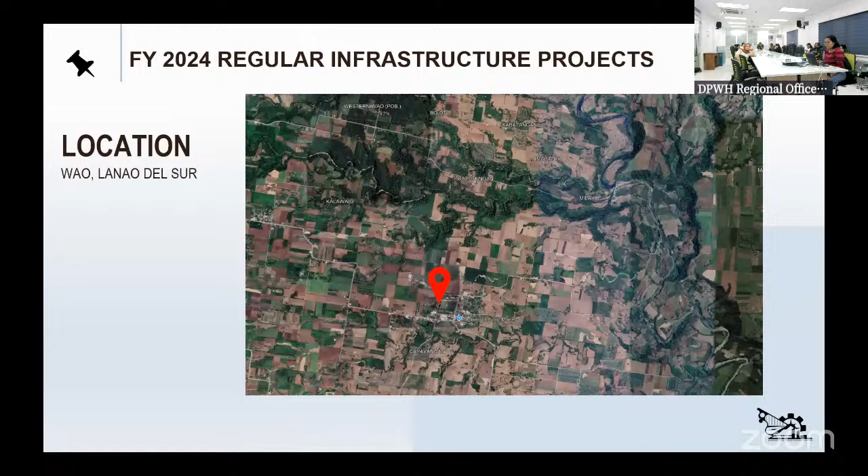Shown is the location map, the perspective, the ground floor plan, the second floor plan, the third floor plan, the roof deck floor plan.

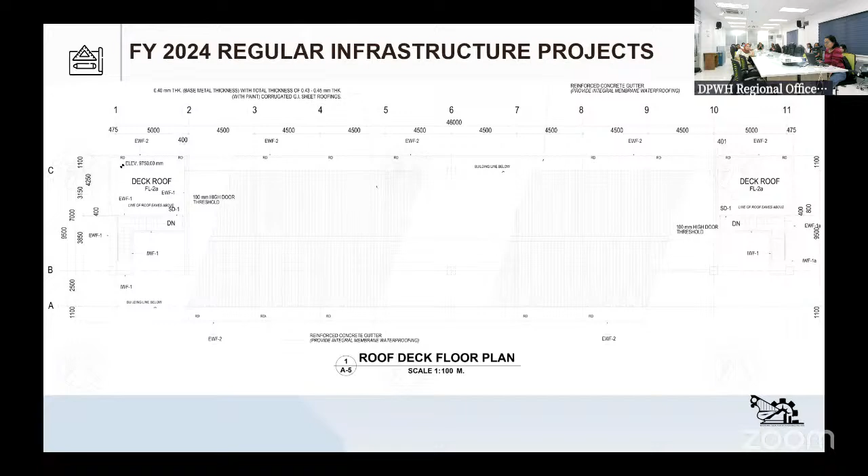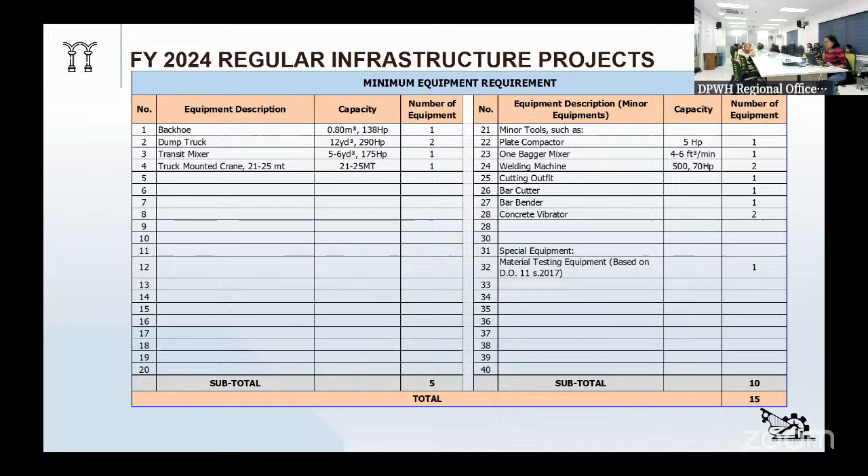For the manpower requirements, we need at least 31 personnel to complete the project. Shown is the minimum equipment requirement. We need at least 15, 5 for the major equipment and 10 for the minor equipment, with the inclusion of material testing equipment based on DO11 series of 2017.

The status of submittal, PAO, DED, and BUQ are already approved. Shown is the approved cover page of the project. Thank you. That's for FY 2024, sir.

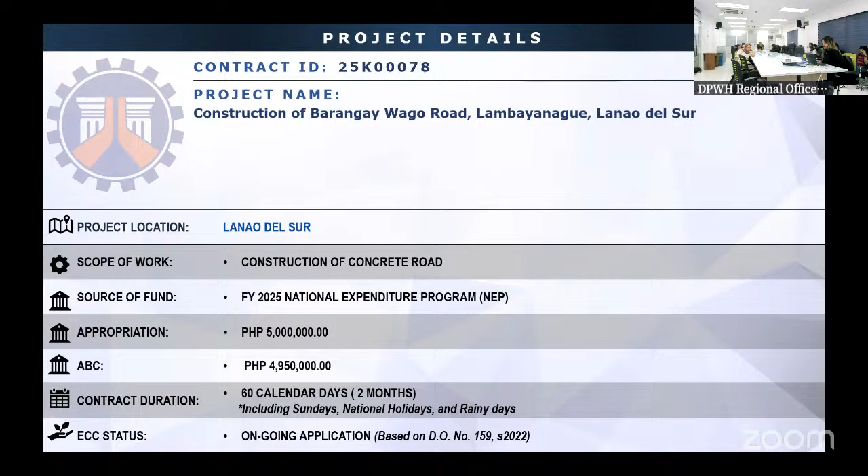For our first project with contract ID 25K00078, construction of Barangay Wago Road, Lambayanague, Lanao del Sur. Project location, Lanao del Sur. Scope of work, construction of concrete road. Source of fund, FY 2025 NEP, appropriation of 5 million with an ABC of 4,950,000, contract duration of 60 calendar days.

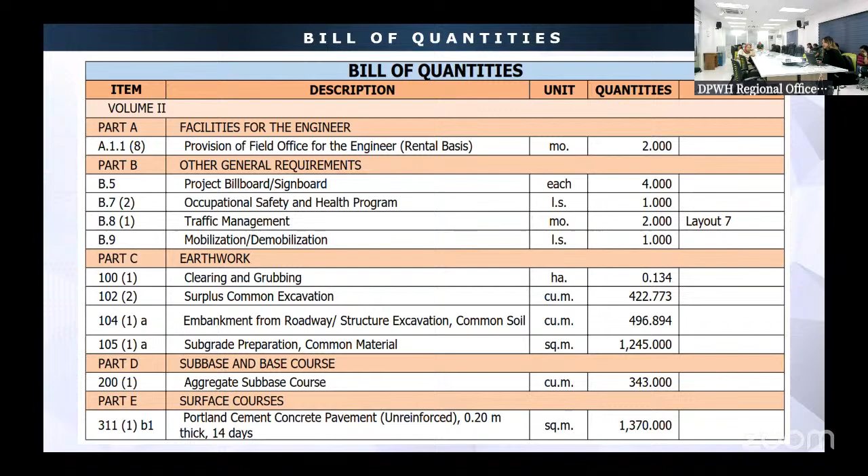For bill of quantities, we have Part A, facilities for the engineer; Part B, other general requirements; Part C, earthwork; Part D, sub-base course; and Part E, surface courses.

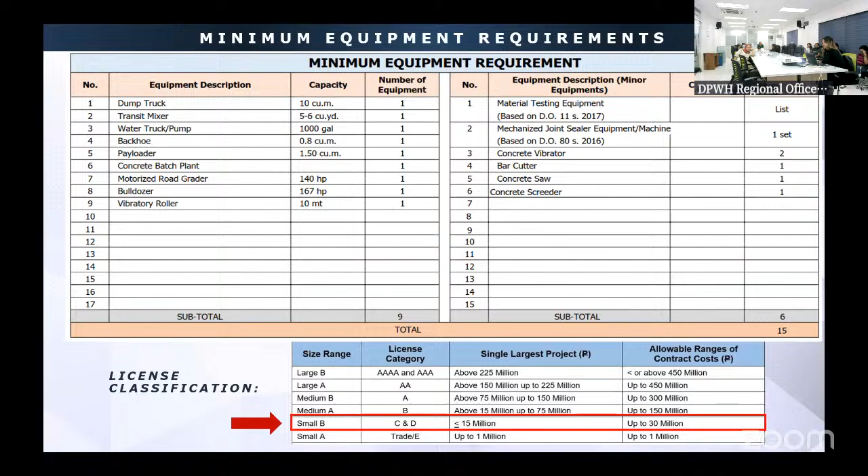For the minimum equipment requirements, we need a total of 15, and take note that the license classification of this project is at least Small B.

Shown is Department Order 11 series of 2017, inclusion of the minimum material testing equipment in the technical component of the bid. Department Order 80 series of 2016, mandatory use of joint sealer equipment, machine for sealing joints on concrete pavements, for small contractors. For the manpower requirements, we need a total of 27 personnel to complete this project.

The status of submittals for this project is already approved, and shown is the approved cover page of the project plan. Any questions?

Project location, Lanao del Sur. Scope of work, road widening. Source of fund, FY 2025 NEP, appropriation of 30,961,000 with an ABC of 29,877,365 pesos, with a contract duration of 120 calendar days, and the ECC status of this project is ongoing application based on DO number 159 series of 2022.

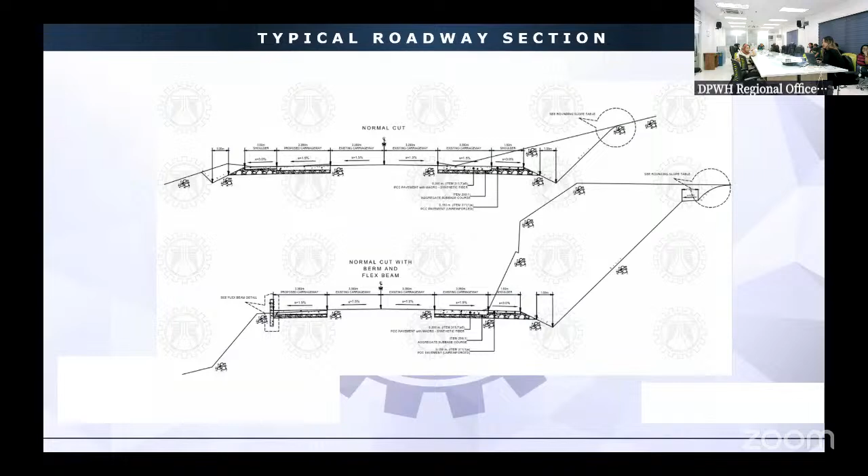Shown is the site development plan of the project, the typical roadway section. For bill of quantities, we have Part A, facilities for the engineer; Part B, other general requirements; Part C, earthwork; Part D, sub-base course; Part E, surface courses; and Part H, miscellaneous structures.

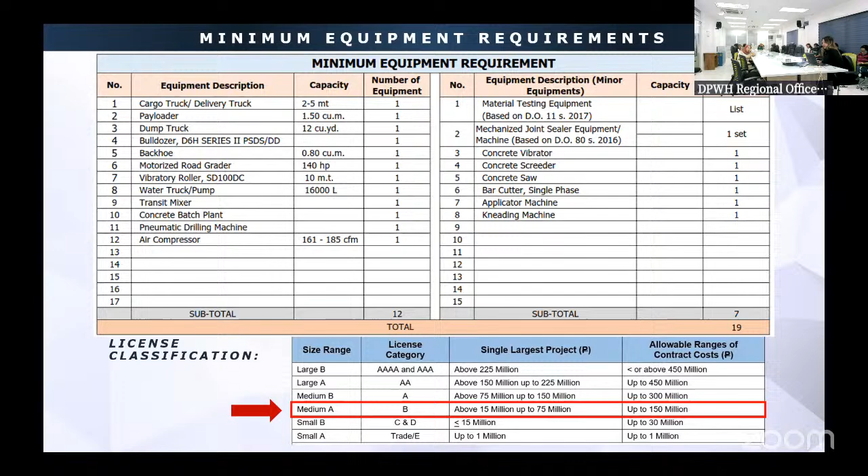For the minimum equipment requirements, we need a total of 19. Take note that the license classification of this project is at least Medium A. Shown is Department Order 11 series of 2017, Department Order 80 series of 2016, for medium contractors.

Engineer Andrina, you should always present the material source map because that is very important information for the prospective bidders. Okay, sir. Thank you.

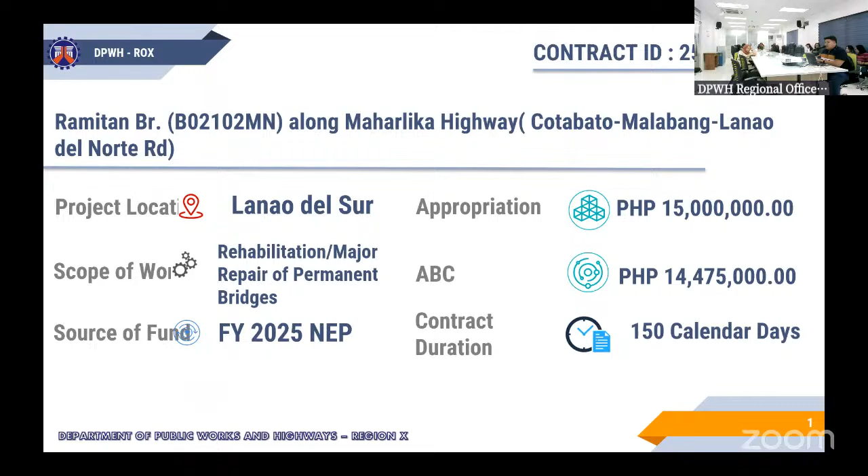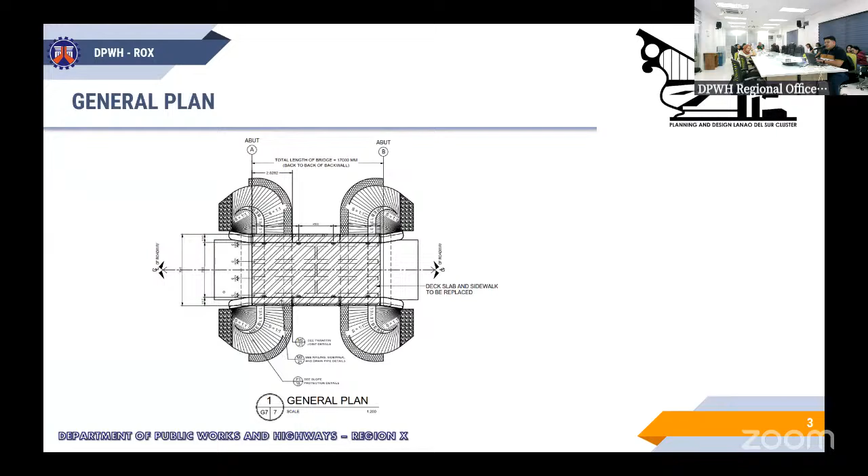Source of fund, FY 2025 NEP, with appropriation of 15 million pesos, an ABC of 14,475,000 pesos, contract duration of 150 calendar days. Shown is the location plan of the project, the general plan, the general elevation.

For the bill of quantities, we have Part A, facilities for the engineer; Part B, other general requirements; Part C, earthwork; Part F, bridge construction; Part H, miscellaneous structures.

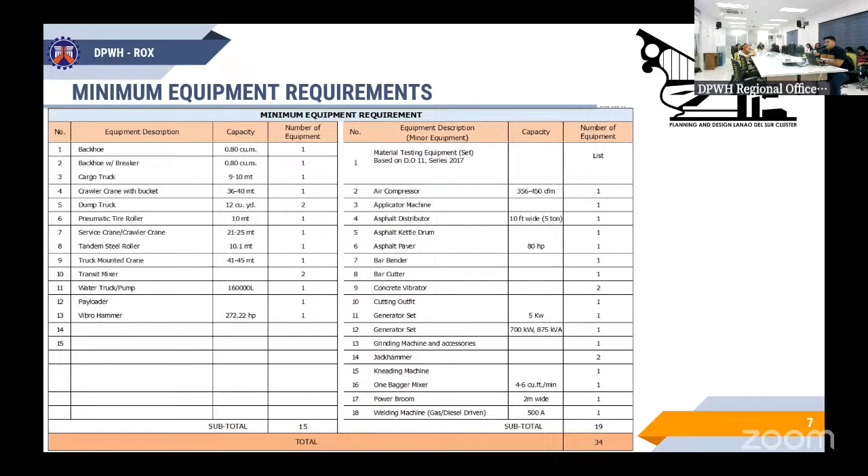For the minimum equipment requirements, we have a subtotal of 19 for the minor equipment and subtotal of 15 for the major equipment, for a total of 34. In compliance with DO 11 series of 2017, inclusion of the minimum material testing equipment in the technical component of the bid, the license classification of the project is Small B.

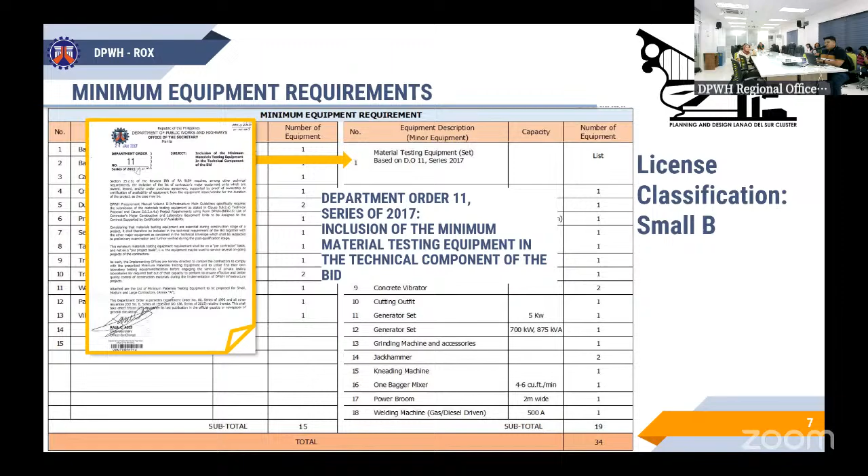Minimum material testing equipment for small contractors. The list of contractors, major construction, and laboratory equipment units to be assigned to the contract, supported by certifications of availability. For the manpower requirements, the project requires at least 32 personnel to complete the project.

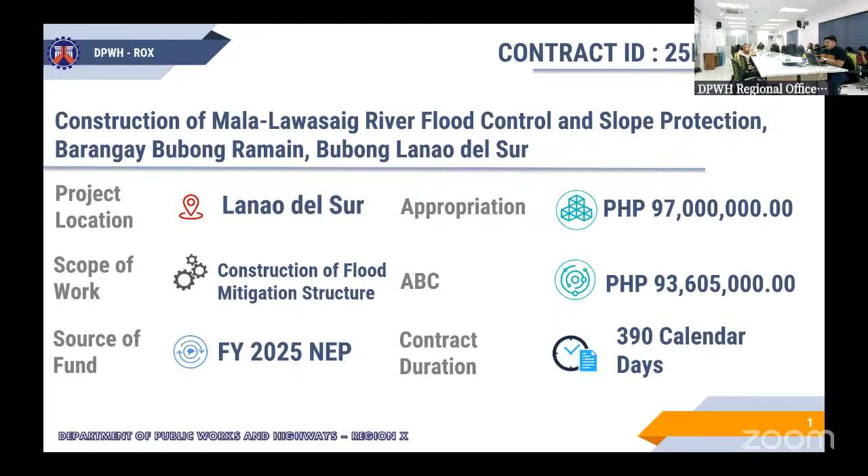The location plan of the project, the typical section with stairs. For the bill of quantities, we have Part A, facilities for the engineer, Part B, other general requirements, Part D, reinforced concrete, Part LA, earthwork, Part LB, bank and slope protection works.

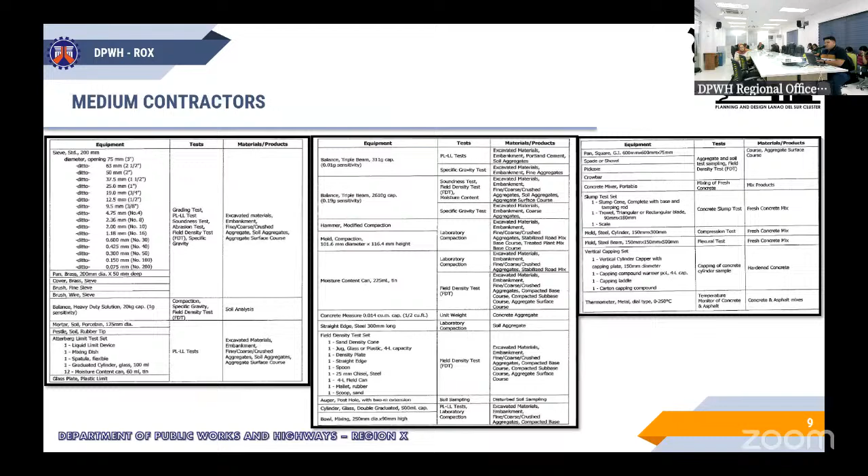For medium contractors, for the manpower requirements, the project requires at least 38 personnel to complete the project. For status of submittals, PAO, ABC, and LUPA, as well as the DED plan and backup quantities are already approved. Shown is the approved DED cover page of the project.

Questions? None. Okay, next. For the last project, we have contract ID

25K00153, Kabaturan Parallel Bridge along Maharlika Highway, Cotabato, Malabang, Lanao del Norte Road, with project location Lanao del Sur. Scope of work: construction of bridge. Source of fund FY 2025 NEP, with appropriation of 60 million pesos, an ABC of 57,900,000 pesos, and a contract duration of 300 calendar days.

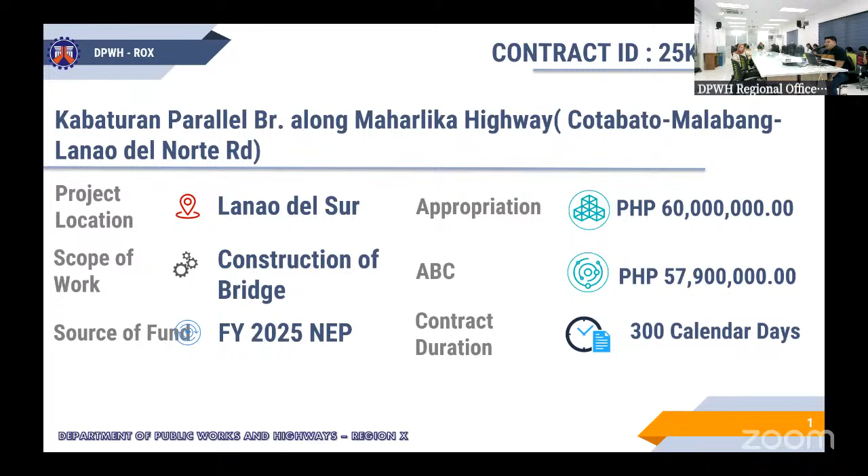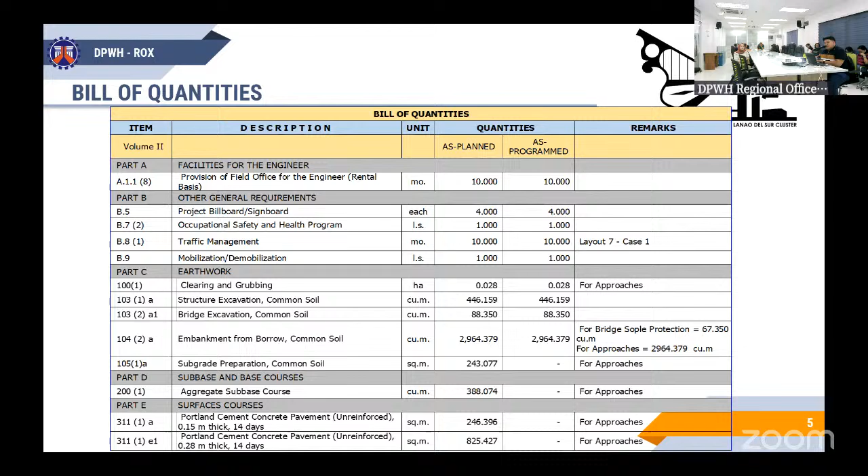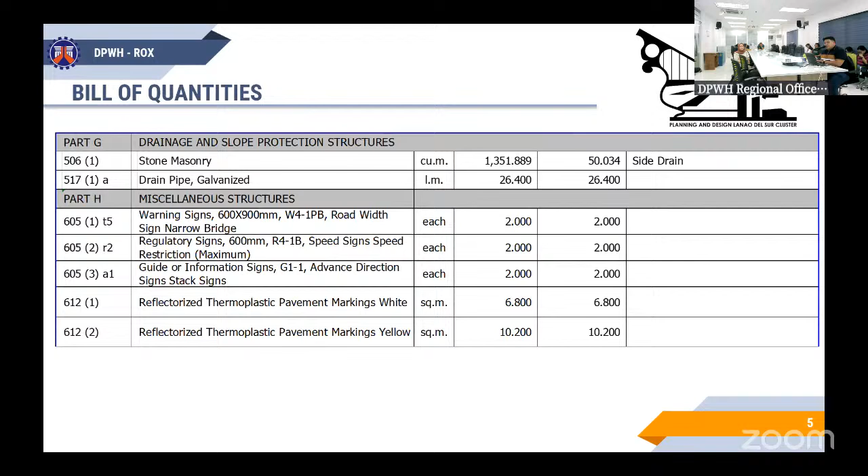Shown is the location plan of the project, the general plan, general elevation. For the bill of quantities, we have Part A, facilities for the engineer, Part B, other general requirements, Part C, earthwork, Part D, sub-base and base course, Part E, surface courses, Part F, bridge construction, Part G, drainage and slope protection structures, Part H, miscellaneous structures.

For the minimum equipment requirements, we have a subtotal of 10 for the minor equipment and a subtotal of 19 for the major equipment, for a total of 29. In compliance with DO 11 series of 2017, the license classification of the project is medium A. For medium contractors, for the manpower requirements, the project requires at least 47 personnel to complete the project.

Status of submittals: PAO, ABC, and LUPA, as well as the DED plan and backup quantities are already approved. Shown is the approved DED cover page of the project. That will be all. Thank you.

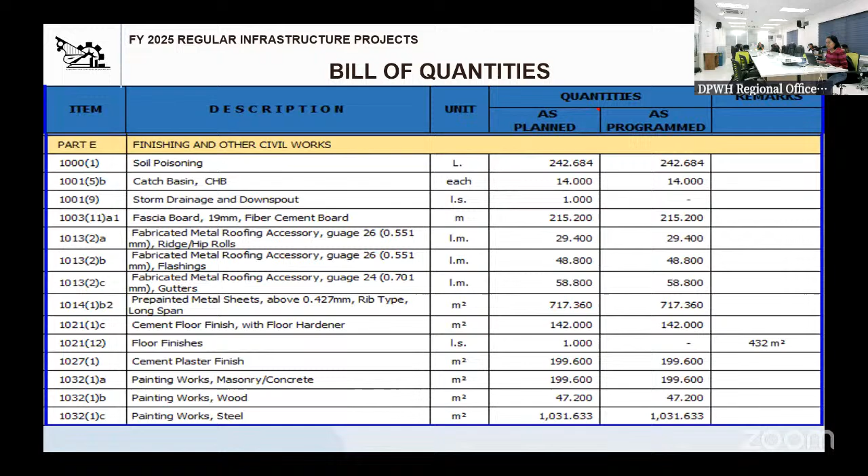The perspective, the ground floor plan, the bill of quantities including Part A facilities for the engineer, Part B other general requirements, Part C earthworks, Part D reinforced concrete, Part E finishing and other civil works, and Part F electrical. For the manpower requirements, we need at least 27 personnel to complete the project.

Status of submittal: PAO, DED, and BUQ were already approved. Shown is the approved cover page of the DED of the project. The material test equipment,

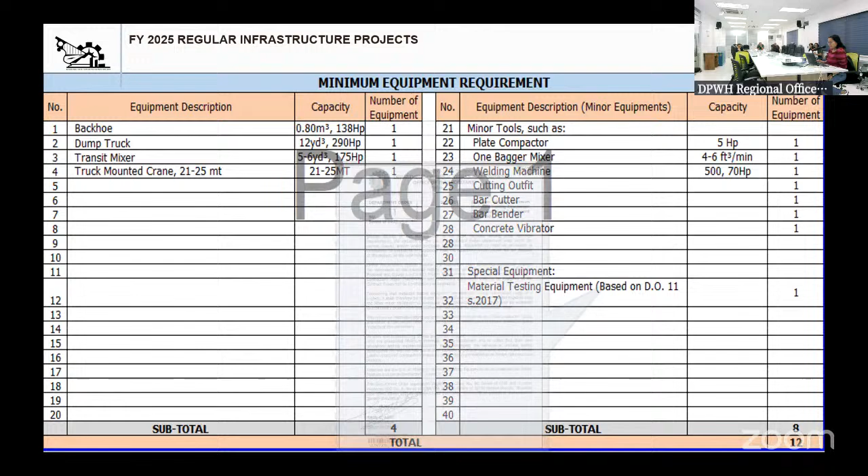Next is 25K00150, construction of multipurpose building, Barangay Lumbak, Tugaya, Lanao del Sur. Contract duration of 129 calendar days. Location Lanao del Sur. Appropriation of 7.5 million pesos.

ABC of 7.425 million pesos. CNC still ongoing. Fund source FY 2025 based on NEP. As shown is the location map, Barangay Lumbak, Tugaya, Lanao del Sur.

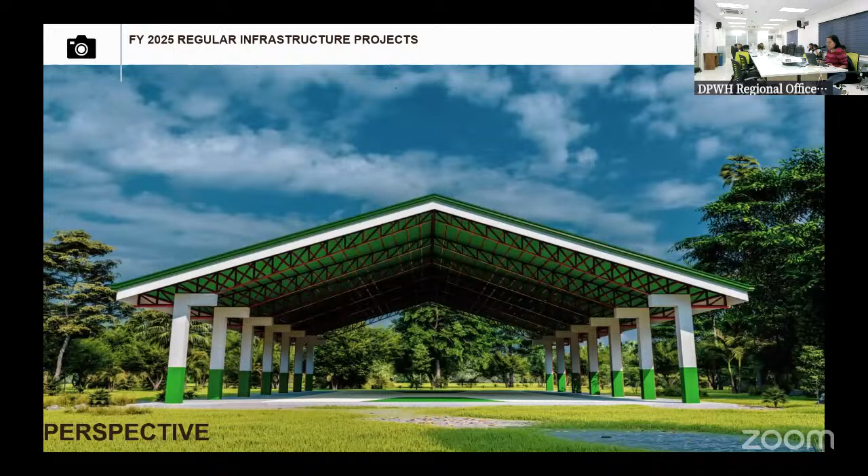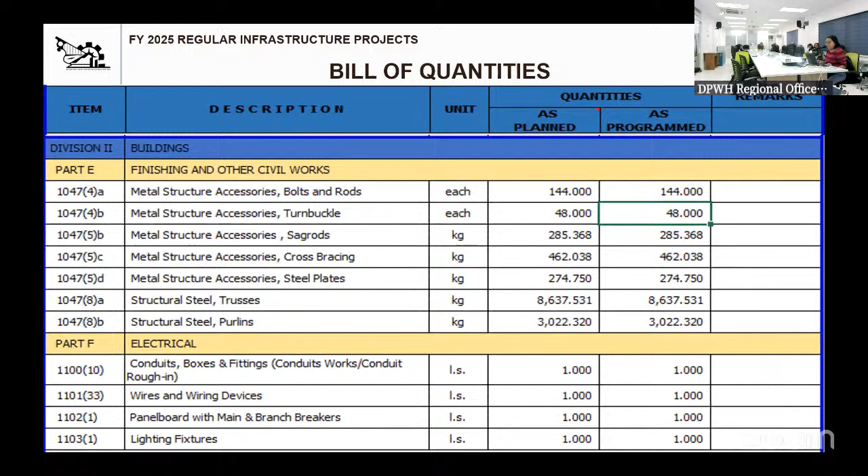The perspective of the project. The ground floor plan. The bill of quantities including Part A facilities for the engineer, Part B other general requirements, Part C earthworks, Part D reinforced concrete, Part E finishing and other civil works, and Part F electrical. For the manpower requirements, we need at least 27 to complete the project.

Status of submittal: PAO, DED, and BUQ were already approved. Shown is the approved cover page of the DED of the project. For the minimum equipment requirement, we need at least 12: 4 for the major equipment and 8 for the minor equipment, with the inclusion of material testing equipment based on DO 11 series of 2017.

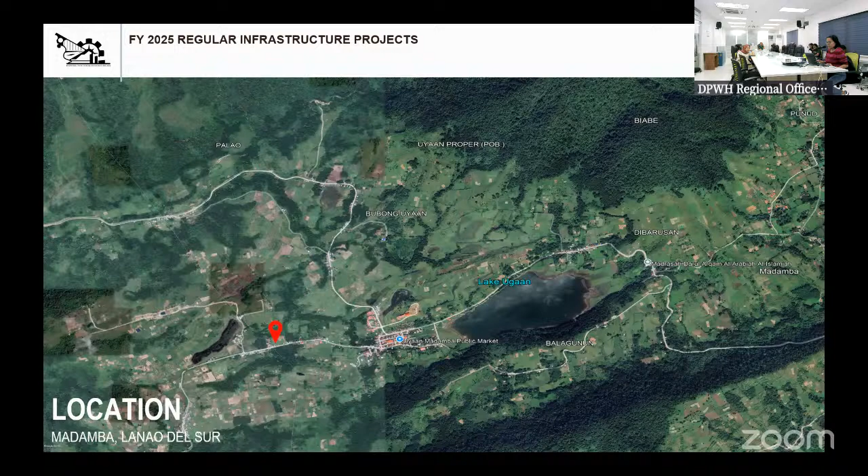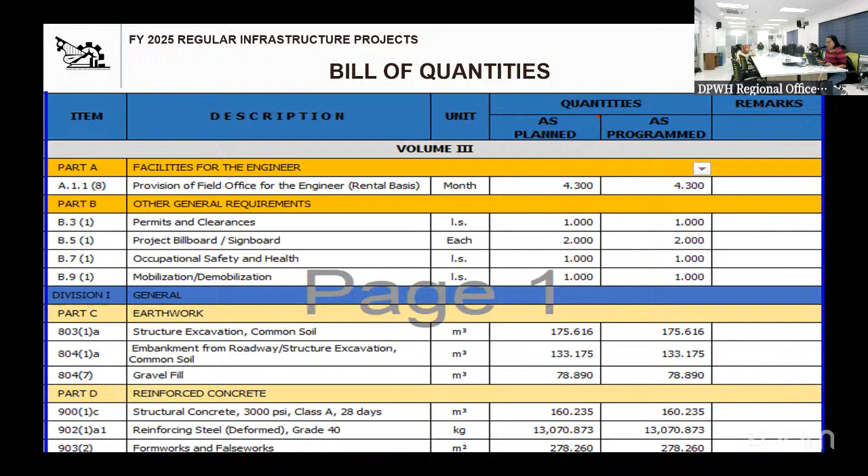Questions? Okay, next. Last is 25K00152, construction of multipurpose building, Malabang, Lanao del Sur.

Contract duration of 195 calendar days. Location, Lanao del Sur. Appropriation cost of 22.5 million pesos with an ABC of 22.275 million pesos. CNC still ongoing. Fund source FY 2025 based on NEP.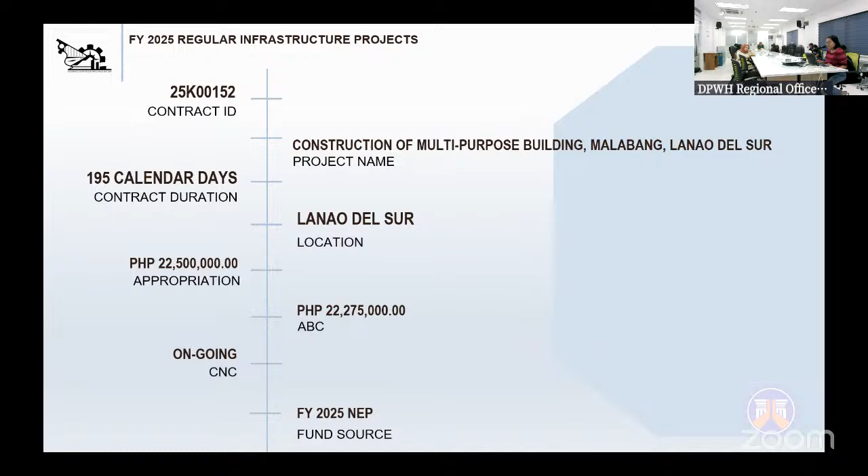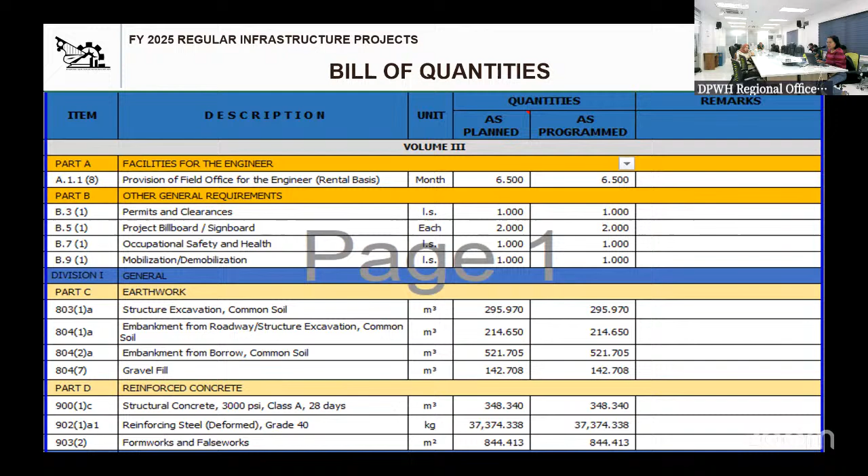Shown is the location map, the perspective of the project, the ground floor plan, bill of quantities with the inclusion of Part A, facilities for the engineer; Part B, other general requirements; Part C, earthworks; Part D, reinforced concrete; Part E, finishing and other civil works; Part F, electrical; and Part G, mechanical.

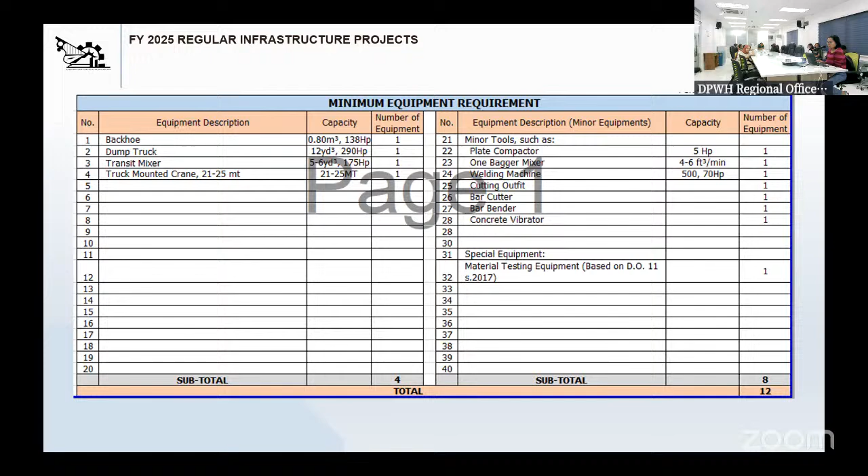For the manpower requirements, we need at least 31 personnel to complete the project. Status of submittal: PAO, DED, and BOQ were already approved. Shown is the approved cover page of the project. For the minimum equipment requirement, we need at least 12 units, 4 major and 8 minor equipment, with the inclusion of material testing equipment based on DO11 series of 2017.

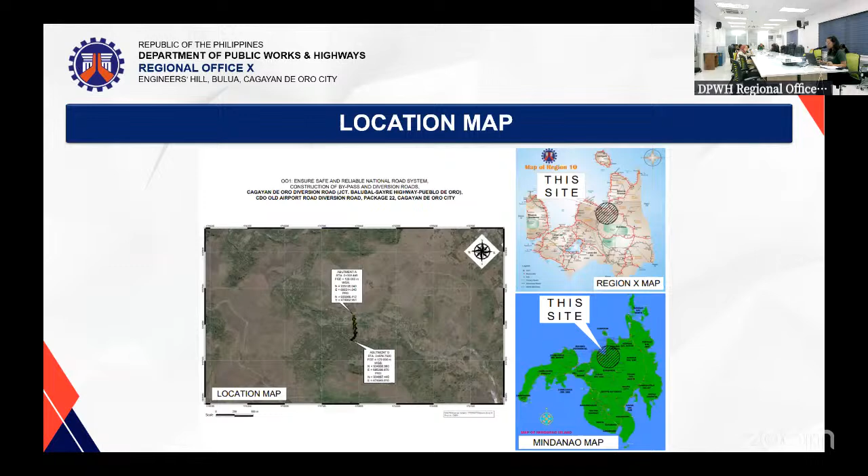Presented is the location map of the project, the topographic plan, the general plan, the general elevation, the typical section for the abutments, and the typical section for the piers. Also presented is the map for the material sources located near the project site.

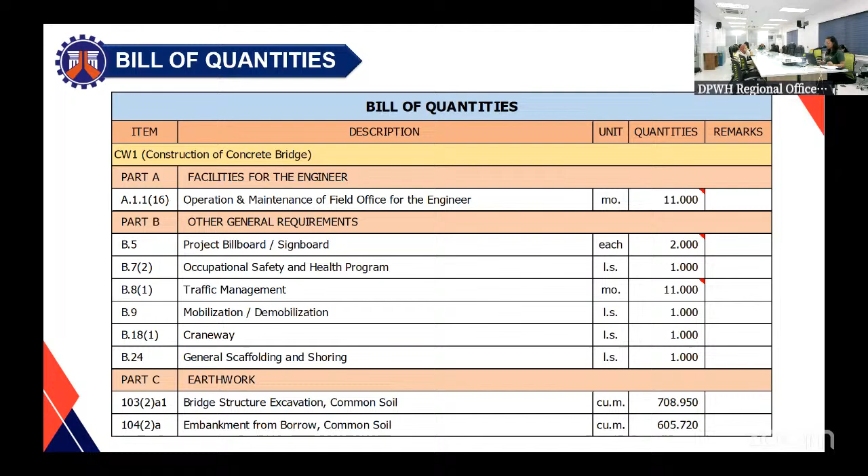For the bill of quantities, the following items are divided into various parts. Part A, facilities for the engineer. Part B, other general requirements. Part C, earthwork. Part F, bridge construction. Part G, drainage and slope protection structure. Part H, miscellaneous structures. For the approaches: Part C, earthwork; Part D, sub-base and base course; Part E, surface courses; Part G, drainage and slope protection structure.

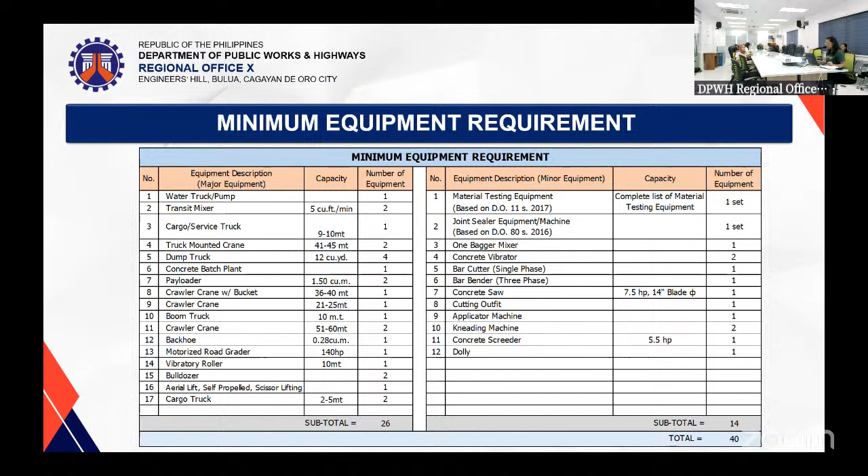For the minimum equipment requirement, this project will require at least 26 major equipment, 14 minor equipment, for a total of 40 equipment, with the inclusion of the material testing equipment and joint sealer equipment, based on DO 011 series of 2017, inclusion of the minimum materials testing equipment in the technical component of the bid.

Presented is the sample format for the list of contractors' major construction and laboratory equipment units to be assigned to the contract, supported by certifications of availability. For the minimum PCAB license, this project will require at least size range large A and license category AA. For the minimum manpower requirement, this project will require at least 82 personnel to complete the project. For the summary of submittals, please be informed that the POW, ABC, DUPA, and DED plan are already approved.

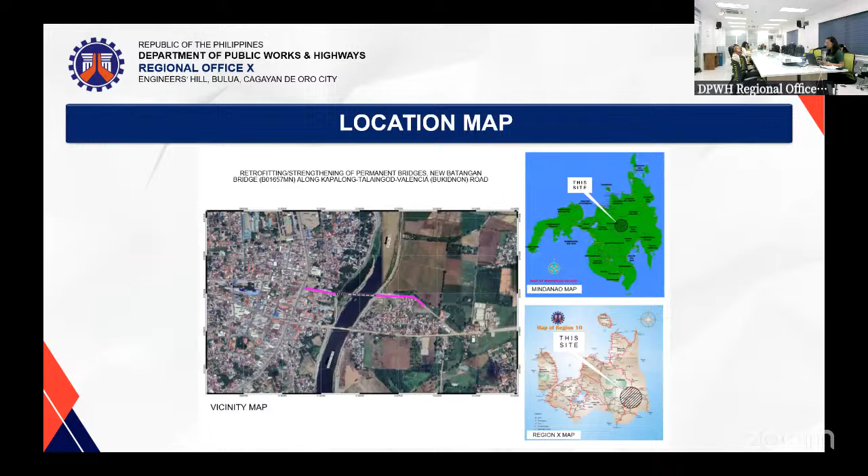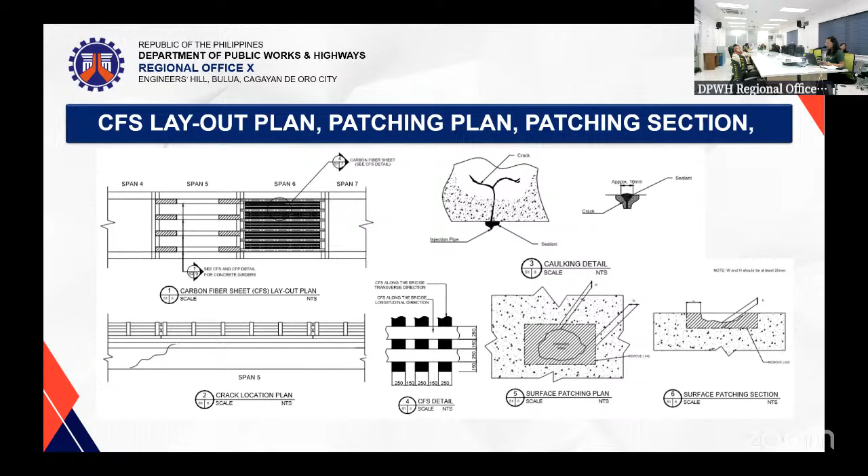Presented is the location map of the project, the topographic plan, the general plan, the CFS layout plan, patching plan and patching section, and the typical girder elevation.

Also presented is the map for the material sources located near the project site.

For the bill of quantities, the following items are divided into various parts: Part A, facilities for the engineer; Part B, other general requirements; Part F, bridge construction. For the minimum equipment requirement, this project will require at least 1 major equipment and 9 minor equipment.

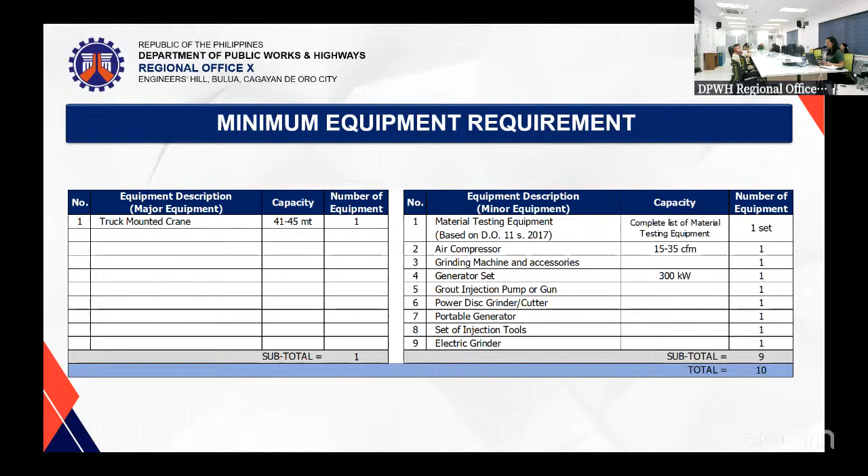For a total of 10 equipment with the inclusion of the material testing equipment set under Department Order number 11 series of 2017, with the subject inclusion of the minimum material testing equipment in the technical component of the bid.

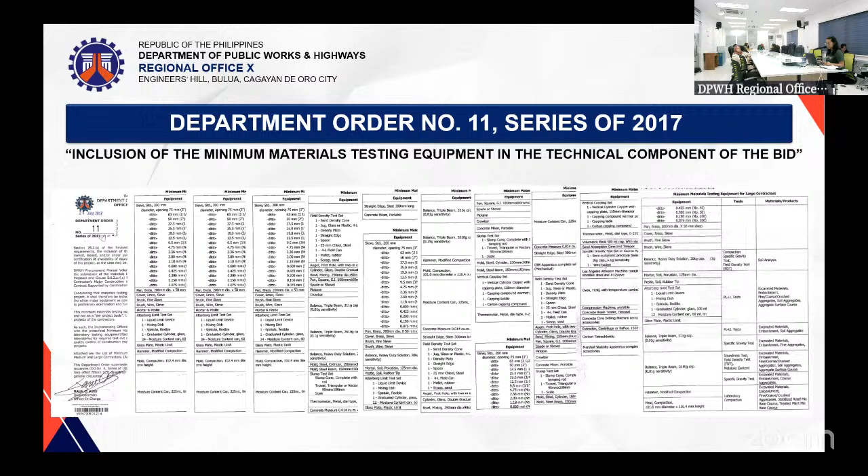For the minimum PCAB license, this project will require at least size range small B and license category C and D. For the minimum manpower requirement, this project will require at least 29 personnel to complete the project.

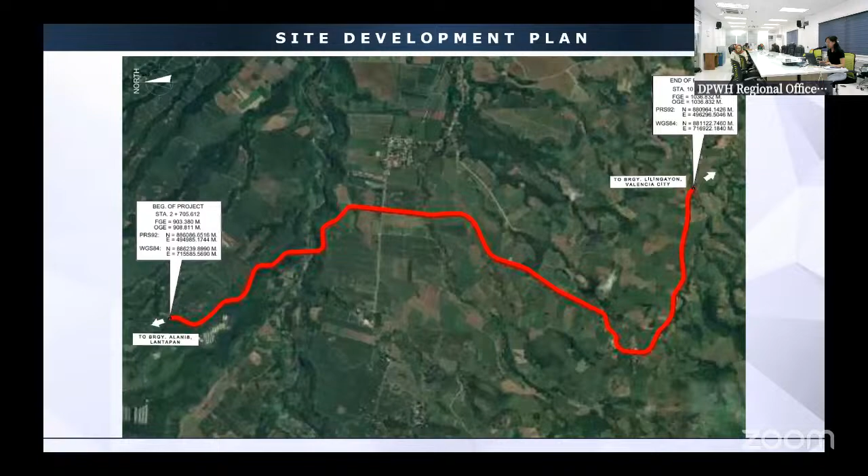Shown is a site development plan of the project. Next is a typical roadway section.

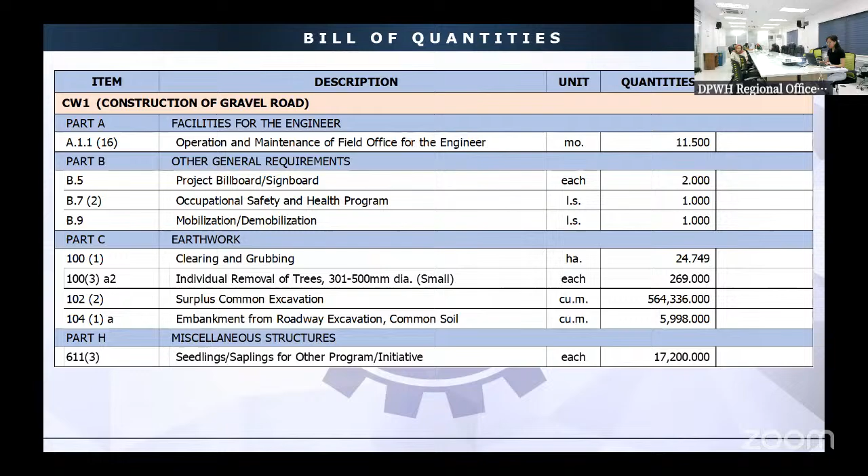For this project, we have a total of 12 required equipment, 11 for the major equipment, and 1 for the minor equipment, including the material testing equipment based on DO11 series of 2017.

For the license specification, the contractor must be at least Large A. DO11 series of 2017 refers to the inclusion of the minimum material testing equipment in the technical component of the bid.

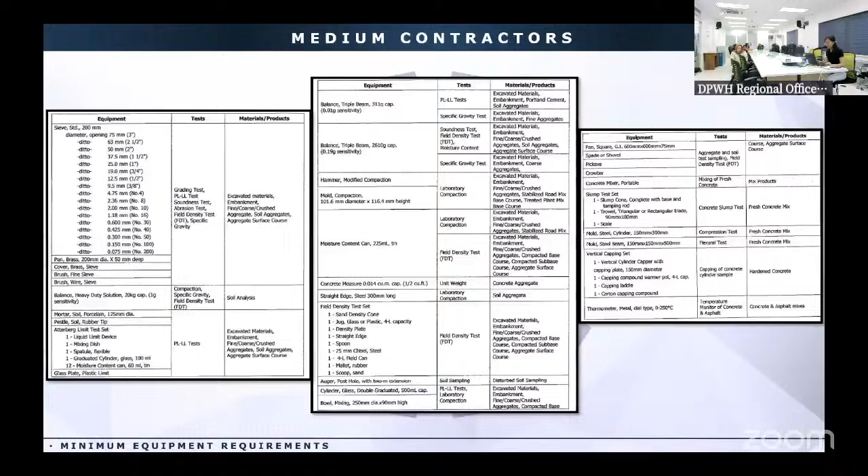Next, shown is the minimum equipment requirements for the medium contractors. Next is for the large contractors.

For the manpower requirements, this project requires 47 personnel, including the project engineer based on DO148 series of 2016 and materials engineer based on DO98 series of 2016.

DO148 series of 2016 refers to the guidelines on the accreditation and assignment of the contractors and consultants project engineers. DO98 series of 2016 refers to the revised guidelines on the accreditation of contractors or consultants materials engineers.

DO 148 is presently amended regarding the requirement of construction engineers for the accreditation of project engineers for the contractors. So maybe we should clarify this as amended by DO 46, series of 2024, on accreditation of project engineers for contractors and consultants. Yes, sir, thank you.

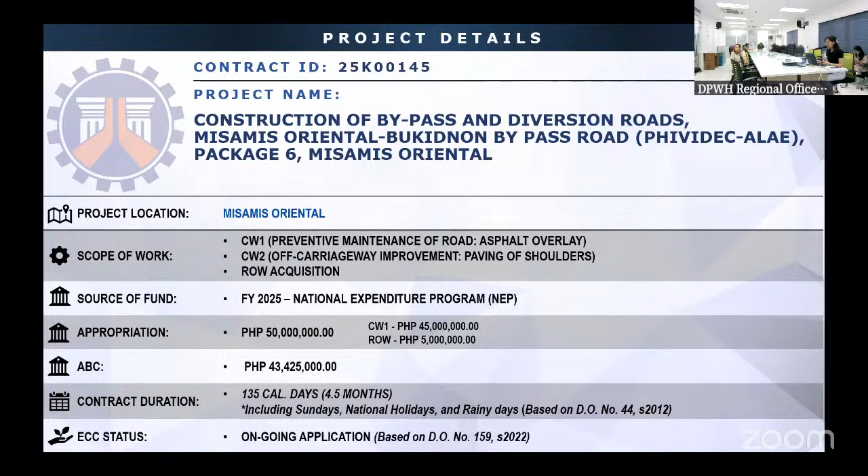CW1, 45 million pesos, and for the ROW, 5 million pesos. It has an ABC of 43 million and 425,000 pesos. This project has a contract duration of 135 calendar days, including Sundays, national holidays, and rainy days. It has an ongoing application for ECC status.

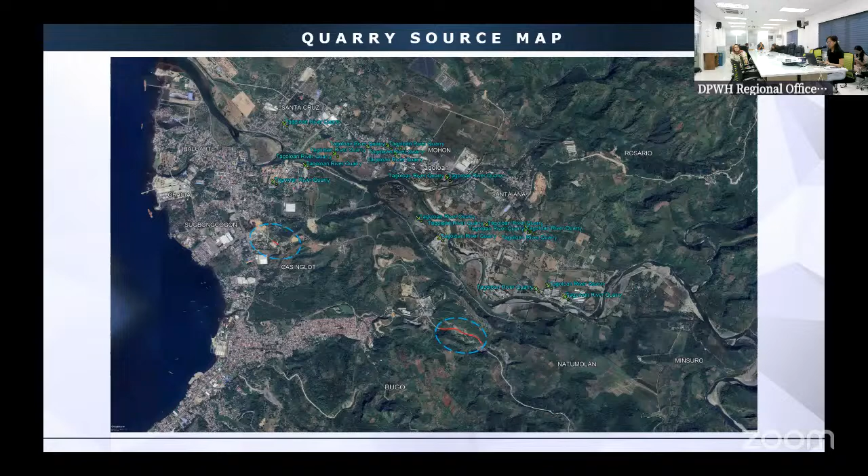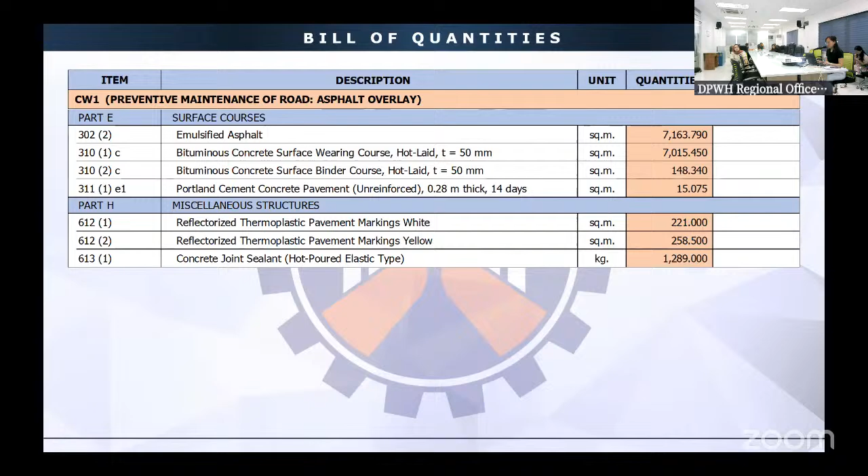We have here the bill of quantities for CW1, preventive maintenance of road asphalt overlay. Then we have the bill of quantities for CW2, off-carriageway improvement, paving of shoulders.

For the minimum equipment requirements, we have a total of 39 equipment: 25 for major equipment and 14 for minor equipment. For the license classification, the contractor must be at least Medium A.

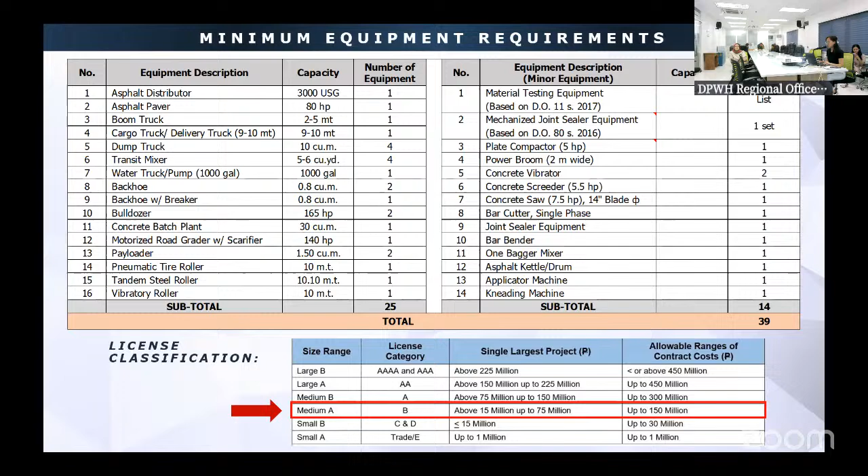Also, for the minor equipment, this includes the mechanized joint sealer equipment based on DO 80, series of 2016, which mandates the use of joint sealer equipment for sealing joints on concrete pavements.

Next, the manpower requirements for this project require a total number of 47 personnel.

Lastly, for the status of submittals, POW, ABC, and DUPA, including the DED plan and backup, are already approved. Shown is the approved DED plan.

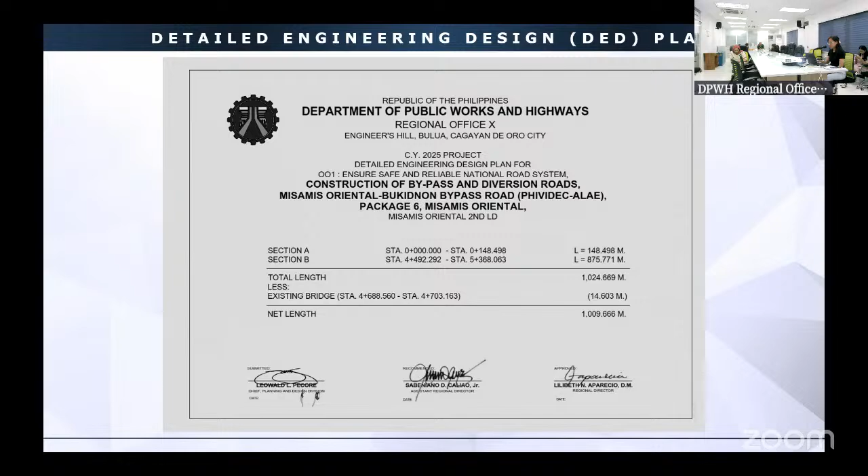Okay, questions? Next project. For our third project, we have 25K00146, construction of bypass and diversion roads, CDOC Iligan Hinterland Road, Junction CDO-Kibaritan Road, Dansolihon Junction, Iligan-Bukidnon Road, Rogongon, Iligan City, Alternate Road, Package 19.

It is located in Iligan City with a scope of work: CW1, construction of gravel road. It has a source of fund from the FY 2025 National Expenditure Program with an appropriation of 250 million pesos and an ABC of 241 million and 250,000 pesos.

This project has a contract duration of 390 calendar days, including Sundays, national holidays, and rainy days. It has an ongoing application for ECC status. Shown is the site development plan of the project.

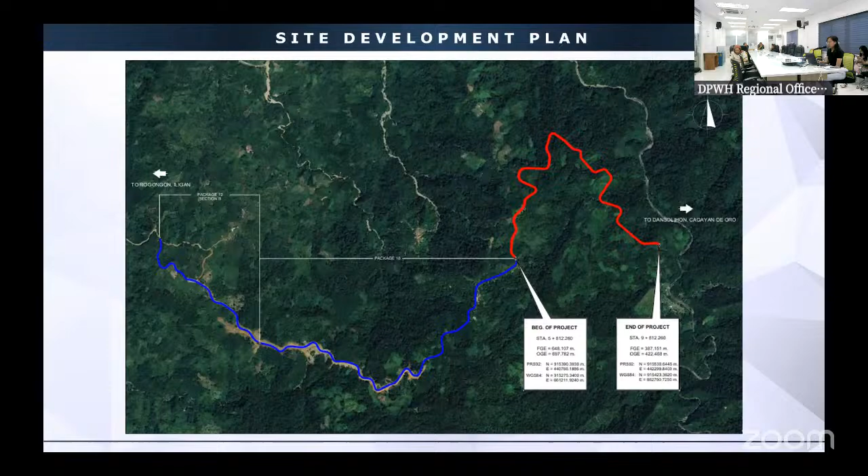Next is a typical roadway section and the quarry sources near the project location. We have here the bill of quantities for CW1, construction of gravel road.

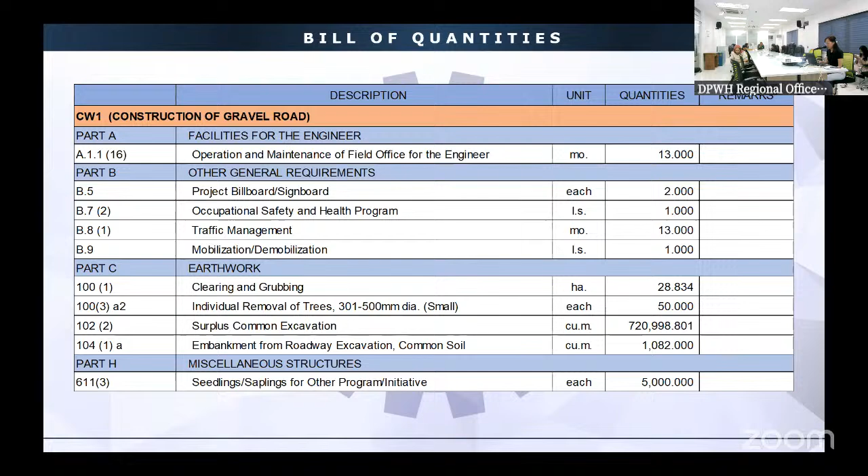For the minimum equipment requirements, we have a total of 12 equipment: 11 for major equipment and 1 for minor equipment. For the license classification, the contractor must be Large B.

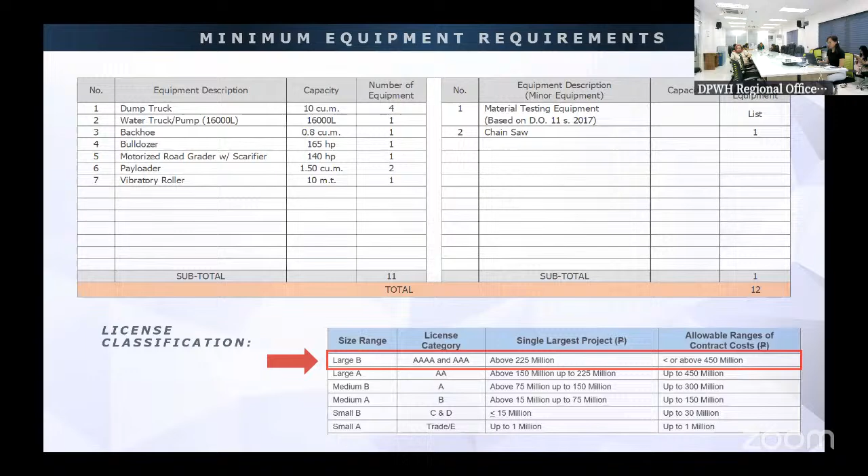For the manpower requirements, this project requires a total number of 47 personnel. And lastly, for the status of submittals, POW, ABC, and DUPA, including the DED plan and backup, are already approved. Next is the approved DED plan.

Okay, questions? None. Next. Next, we have 25K00147, construction of Junction Bukidnon-Davao City Road to Junction Kiburiao-Kitaotao Road, San Jose, Minsalirac, San Isidro, Manuto, Minsamongan, Kiburiao section, package 4, Bukidnon.

It is located in Quezon, Bukidnon, with a scope of work: CW1, construction of gravel road; and CW2, construction of road slope protection structure. It has a source of fund from the FY 2025 National Expenditure Program with an appropriation of 100 million pesos.

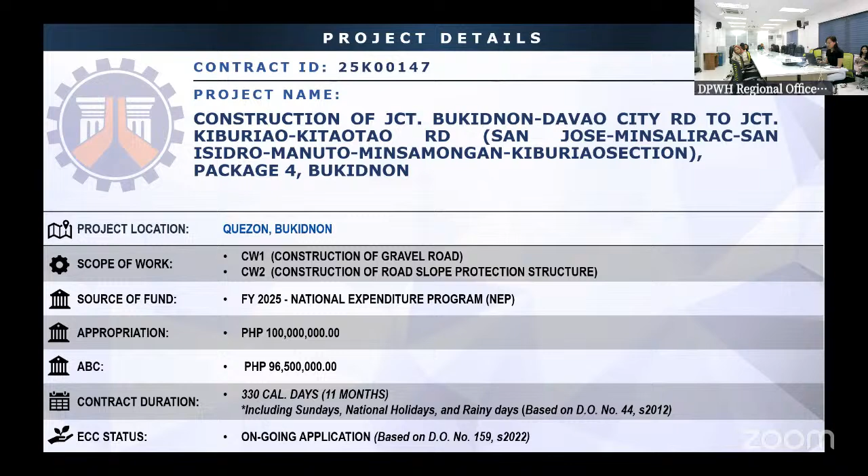And an ABC of 96 million and 500,000 pesos. This project has a contract duration of 330 calendar days, including Sundays, national holidays, and rainy days. It has an ongoing application for ECC status.

Shown is a site development plan of the project. Next is the typical roadway section.

And the quarry sources near the project location. We have here the bill of quantities for CW1 construction of gravel road and CW2 construction of road slope protection structure.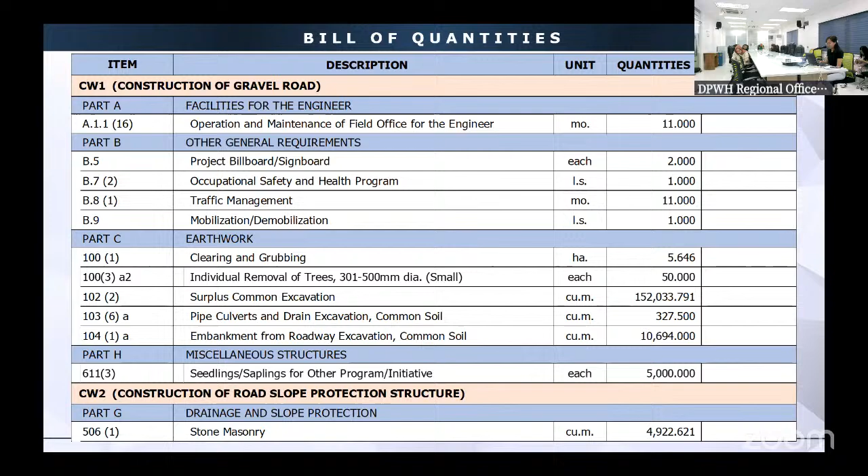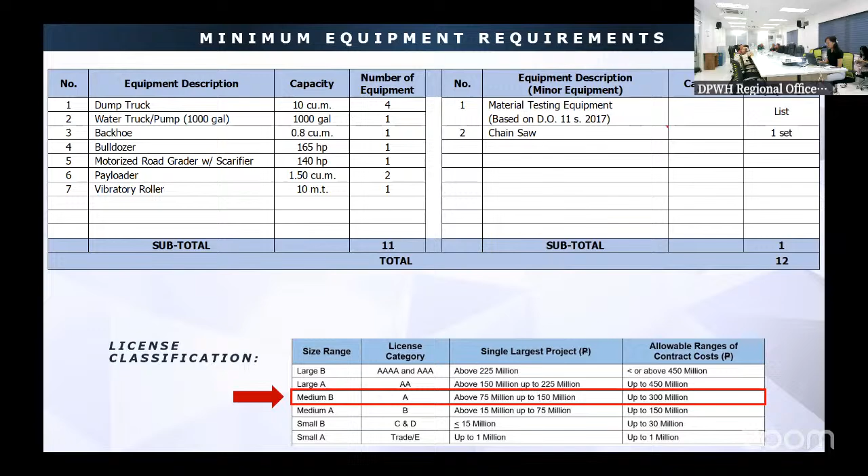For this project, we have minimum equipment requirements of 12 equipment, 11 for major equipment and 1 for minor equipment. For the license classification, the contractor must be at least medium B. This project requires a total of 47 personnel.

Okay, questions? Next, for our last project, we have...

25K00148-001, ensure safe and reliable national road system, asset preservation program, preventive maintenance, tertiary roads, Junction Sayre Highway, Aglayan, Zamboanguita Road, K1544+119 to K1549+109, K1554+462 to K1555, and K1556 to K1557+029, K1564+146 to K1564+841.53.

This project is located in San Fernando, Bukidnon, with a scope of work CW1 preventive maintenance of road asphalt overlay, with a source of fund from FY 2025 National Expenditure Program with an appropriation of 164,300,000 pesos. It has an ABC of 158,549,500 pesos. This project has a contract duration of 210 calendar days, including Sundays, national holidays, and rainy days.

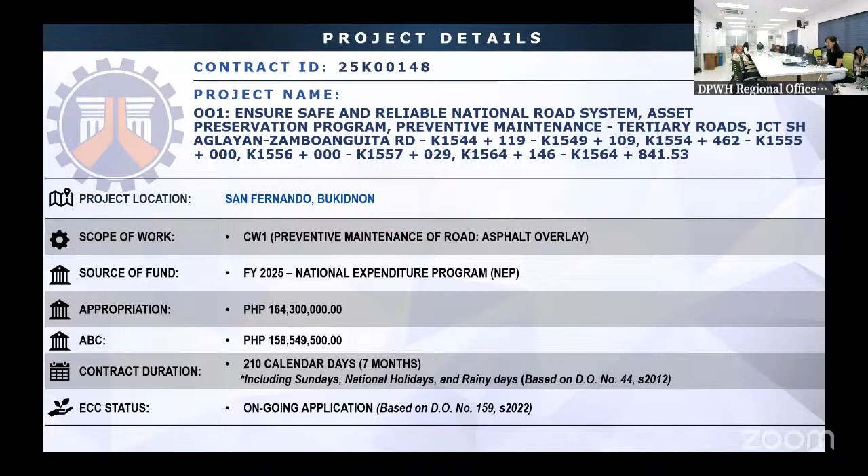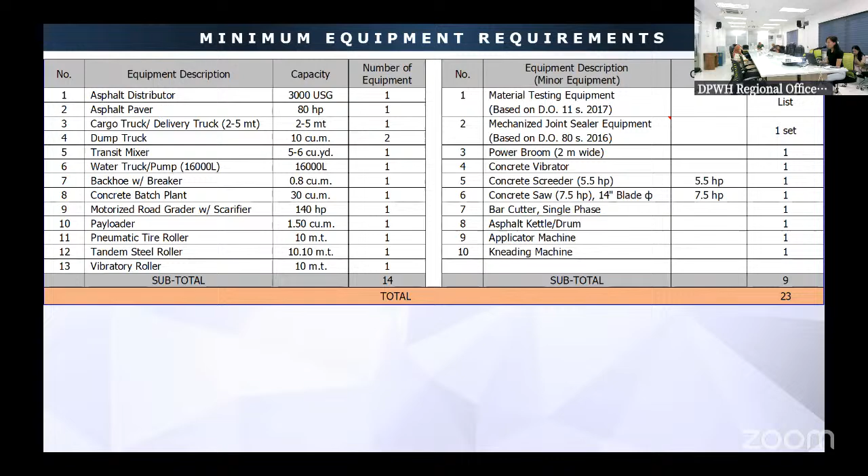We have here the bill of quantities for CW1 preventive maintenance of road asphalt overlay. For the minimum equipment requirements, this project requires a total number of 23 equipment, 14 for major equipment and 9 for minor equipment. For the license classification, the contractor must be at least large A.

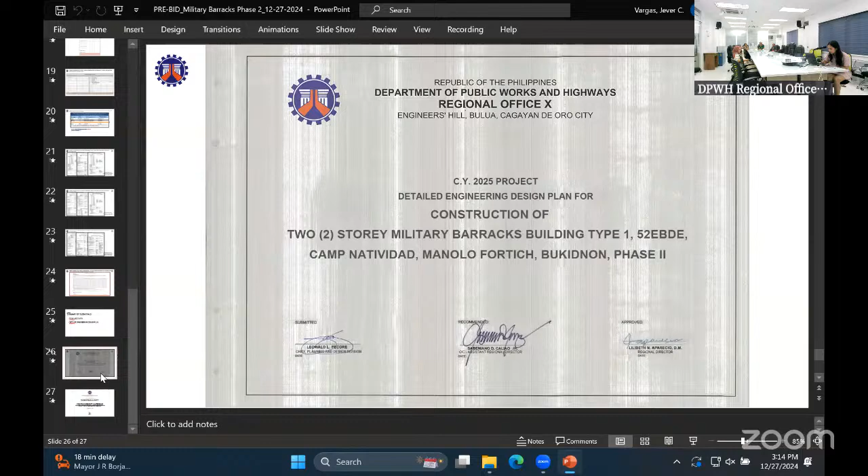Good afternoon, everyone. I'm Engineer Andrea Batar, and for this pre-bid conference I will be presenting one building project. For the project with contract ID 25K00052, with the project name Construction of Two-Story Military Barracks Building Type 1, 52 EBDE, Camp Natividad, Manolo Fortich, Bukidnon, Phase 2, located at Camp Natividad, Manolo Fortich, Bukidnon, with an appropriation of 30 million pesos and an ABC of 28,950,000 pesos.

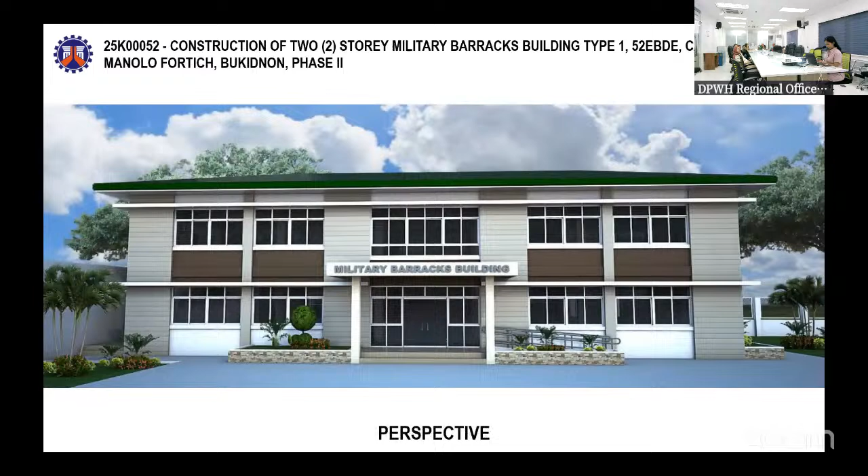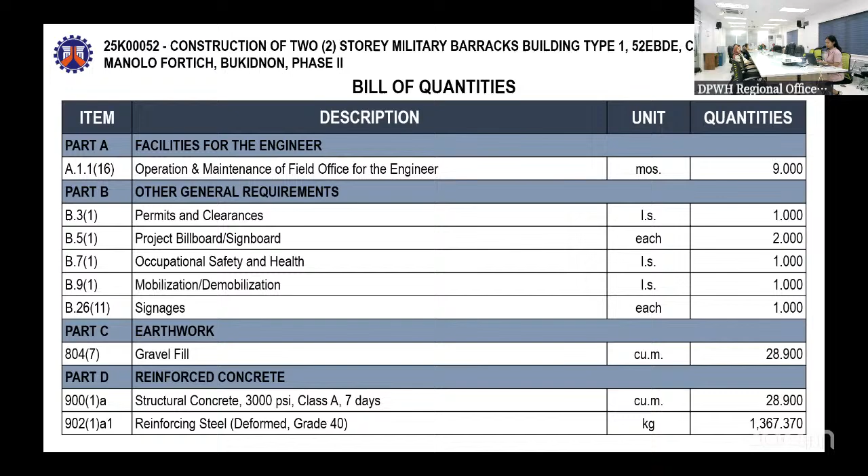For the bill of quantities, we have Part A, facilities for the engineer, Part B, other general requirements, Part C, earthwork, Part D, reinforced concrete, Part E, finishing and other civil works, Part F, electrical, and Part G, mechanical.

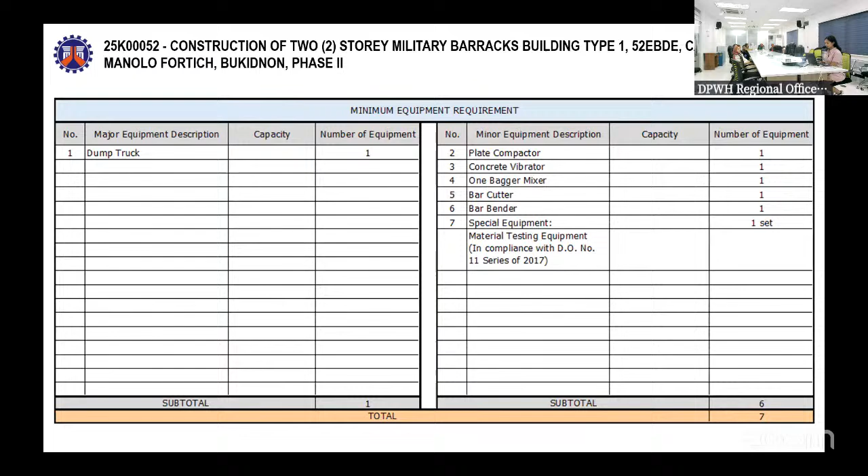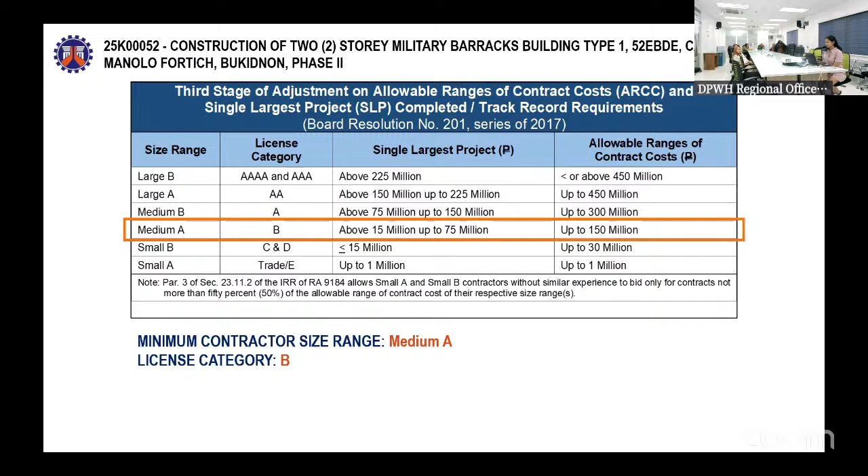For the minimum manpower requirement, we have at least 24 personnel. For the minimum equipment requirement, we have 1 major equipment and 6 minor equipment, with a total of 7. For the minimum contractor size range, we have at least medium A and a license category of at least B.